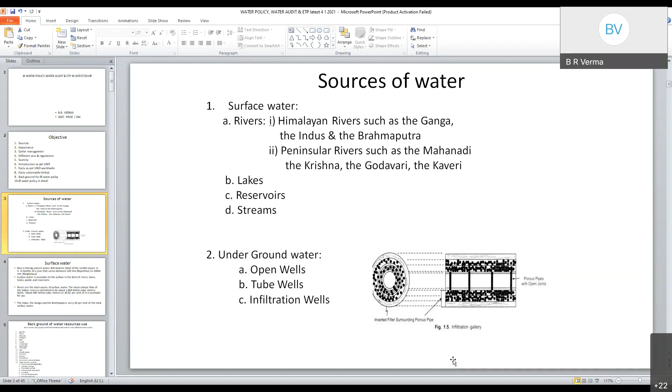Now you can see from where this surface water comes - rain is the main source of water. You can say the atmospheric cycle, which creates this rain, has uneven distribution all over the world, and also in our country.

As you know, rainfall in India is somewhere very less, as low as 100 mm, that is in Rajasthan, particularly Jaisalmer and the desert area of Rajasthan, and as much as 10,000 millimeters like in Meghalaya or some of the northeastern states.

Surface water is available on the surface in the form of ponds, reservoirs - either man-made or naturally made, tanks, and rivers, which are the main source of surface water.

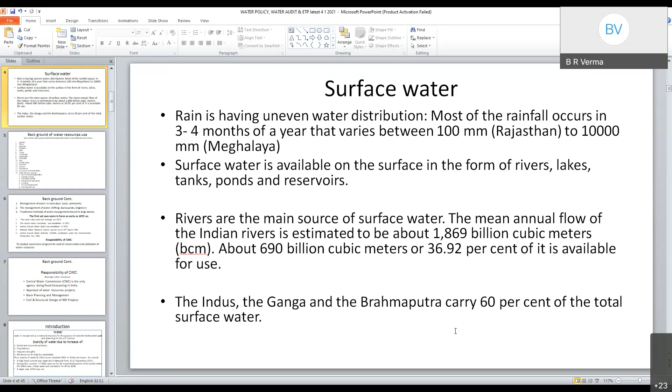The annual flow of Indian rivers is estimated to be 1869 billion cubic meters. But only 690 billion cubic meters, or we can say roughly 37%, of the river or surface water is available for our use. The Ganga, Brahmaputra and Sindhu rivers are the major rivers which generate 60% of the total surface water in the country.

Then we can go on to what was the background of water resources used in earlier days, long back, how water has been managed in society.

In the old days, people were deprived of water because of different reasons - whether gender, race, ethnicity, religion, birth, caste, language or nationality, disability, age, health status, property, prosperity, tenure, residence, economical and social status, etc.

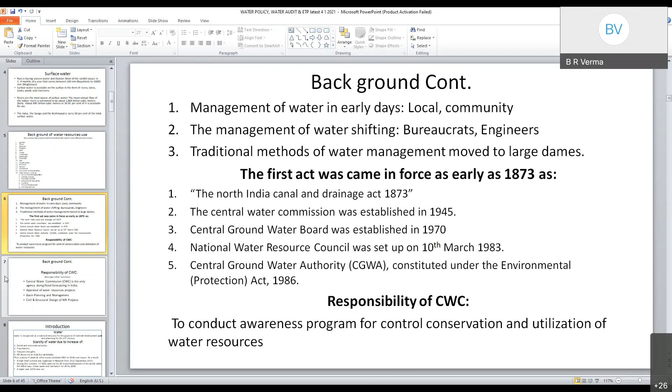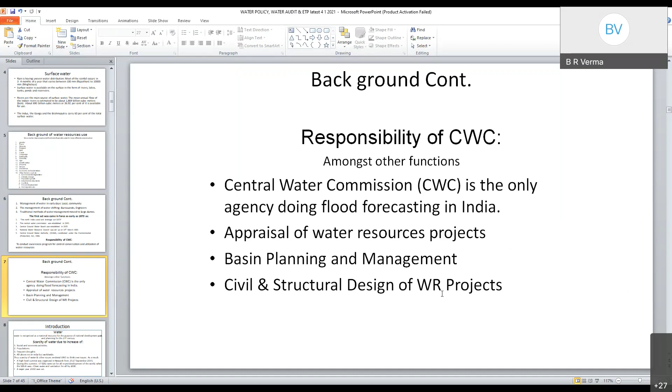The Central Water Commission, among other functions, also does flood forecasting, and the appraisal of water resource projects like big basin dams and other major civil structures, all of which come under the purview of the Central Water Commission in addition to other functions.

Water has been considered a national resource for the development of society and the country. As you know, the scarcity of water came in the way of the development of our country.

Water scarcity increased due to the increase in population and economic activities, along with frequent droughts occurring over the last several decades. These droughts, population increase, and economic activities, including industrial development, also utilize enormous amounts of water.

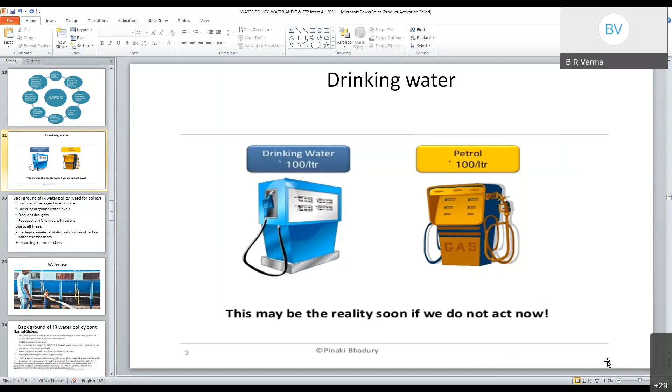So as of now, I think it was several years back, but as of now it is the real picture: the petrol and the drinking water can be bought at the same cost.

Now we come to the background of Indian Railway water policy and why it was needed. What was the need for this policy? What rendered the framing of the Indian Railway water policy?

It has been observed that Indian Railway is one of the largest users of water. Indian Railway uses the largest water in operation, in stations, for so many uses.

Then there is lowering of groundwater levels because of extensive extraction of water for agriculture as well as for drinking. As we are extracting enormous water from the ground, the groundwater level is lowering down.

Then frequent droughts also rendered this water scarcity. Also, reduced rainfalls in certain regions created scarcity of water in those areas.

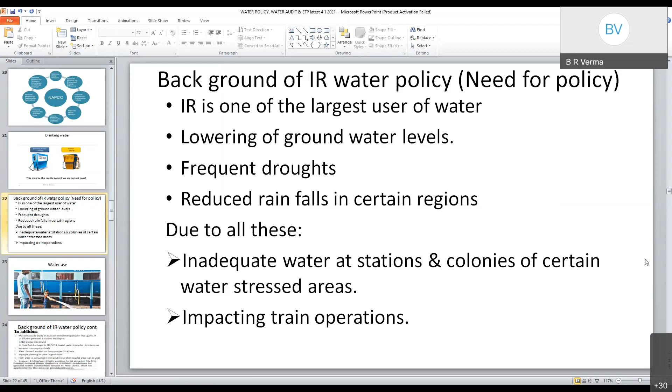The National Green Tribunal, New Delhi, issued orders in a case on environment pollution which was filed against our Indian Railway.

The effluent order was issued in the sense that the effluents generated at the stations and depots or sheds should not be allowed to seep into the ground.

First, these effluents generated at stations or colonies or hospitals, sheds, workshops, etc., should first be discharged to effluent treatment plants or STPs, and the treated water should be recycled for inferior use, so that fresh water use should be avoided or reduced.

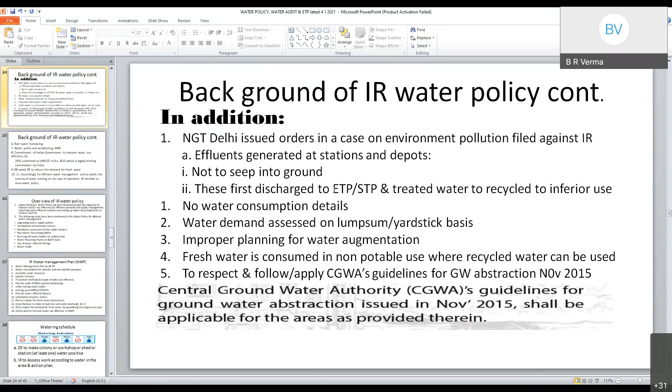Also, to respect and follow the Central Groundwater Authority's guidelines for groundwater abstraction, we are compelled to follow the instructions and guidelines set by the Central Groundwater Authority, which are in the form of a booklet published in November 2015, and that is to be followed in toto by railway. Also, rainwater harvesting was to be generated. Then water audits and establishing water recycling plants.

The Indian government made a commitment to improve water use efficiency by 20%, which was submitted to the United Nations Framework Convention on Climate Change in October 2015, and this was a legally binding commitment for India. Hence this also became one of the reasons for the Indian Railway water policy, because the Indian government committed in the United Nations Framework Convention on Climate Change that we will improve water use efficiency by 20%, and to fulfill this we have to work on this.

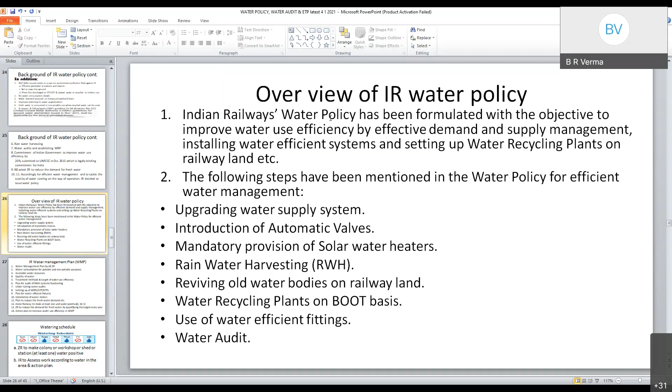Now, as per the Indian Railway water policy, a water management plan is to be framed, and it is to be developed by all the zonal railways, even the workshops and production units, at the DRM level, etc. Then water consumption for potable and non-potable purposes should also be recognized. The available water resources are to be utilized in an efficient way.

The quality of water should be ensured. The treatment methods and targets of water use efficiency should be ensured. The plan for audit of rainwater harvesting systems and their functioning is also required to be ensured. Undertaking water audits, setting up water recycling plants,

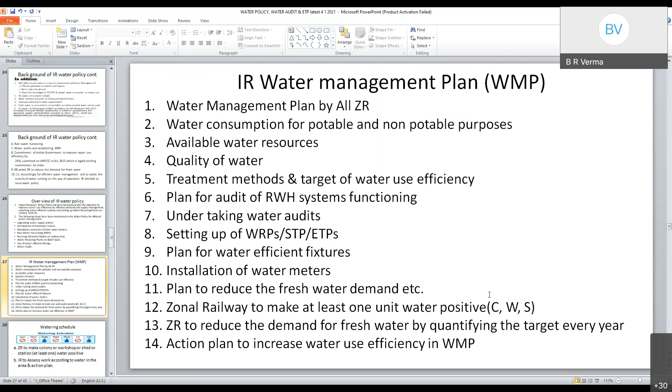Also, the watering schedule should be made and ensured, that is, which day water is to be supplied and which day not, as is available nowadays in the big cities like Delhi or Bombay or the major cities.

So zonal railways are to make colonies, workshops, sheds or stations water positive. Indian Railway is to assess work according to water in the area, and the action plan should be prepared. In that, the Central Groundwater Authority report may be consulted to assess those areas which the Central Groundwater Authority has mentioned as water stressed areas. So at least in those areas, Indian Railway is to assess the work according to water.

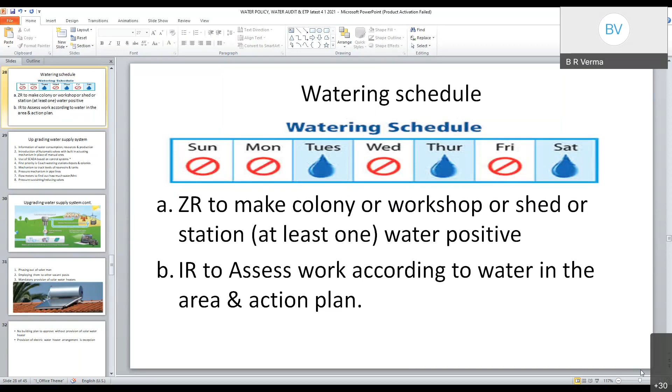Now, upgrading the water supply system: how the zonal railways and all the production units or workshops are required to upgrade the water supply system. In this, the information of water consumption, resources and production, that is, how much production, what are the resources, and how much water is being consumed in a particular zonal railway, workshop or production unit.

Then the introduction of automatic valves with built-in actuating mechanism. Prior to that, we were using manual valves, and for those valves, certain posts or a man was available to open or close them. So in place of those manual valves, automatic valves are to be introduced. This has been asked of all the zonal railways.

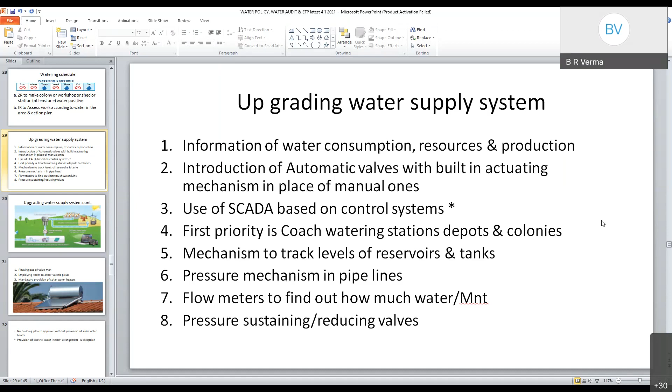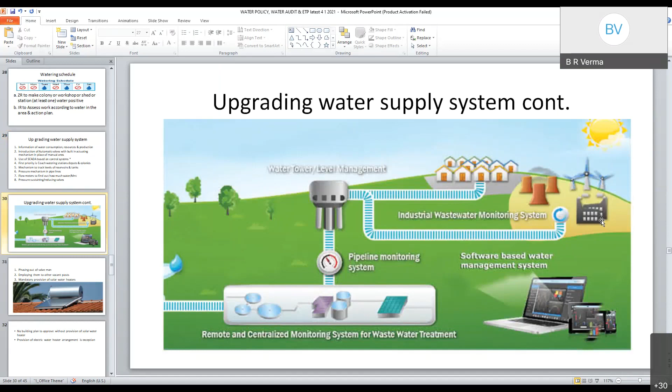Then flow meters are also asked to be developed to find out how much water per minute is being supplied. Then pressure sustaining or reducing valves. These valves automatically sustain pressure: on low pressure they increase it, and on high pressure they automatically reduce it. Such features are required to be set up so that the water supply can be upgraded. You can see, in upgrading the water supply system, this type of arrangement should be made.

Now, phasing out of valve men. A designation of a person, the valve man, was engaged in Indian Railway to open and close the valve. The work time for this man was very less; he was usually going to close or open the valve at a particular time. So railway has asked to phase out these valve men, and they are to be adjusted against the vacancies available, so that we can reduce the workforce by providing the mechanism in place of the man, employing these valve men in vacant posts.

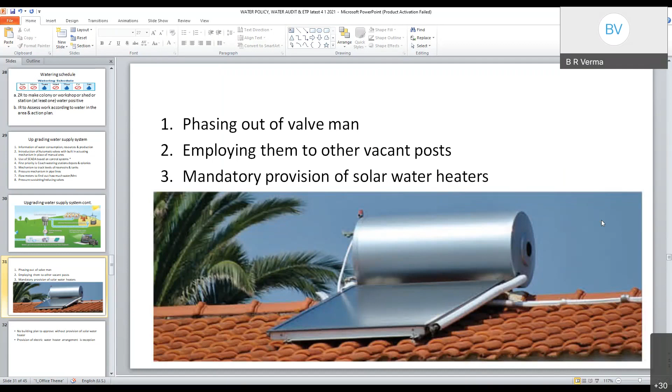Mandatory provision has also been asked of the zonal railways for solar water heaters. That is, each and every building or shed should have the provision of a solar water heater, so that we can reduce the electricity or light energy.

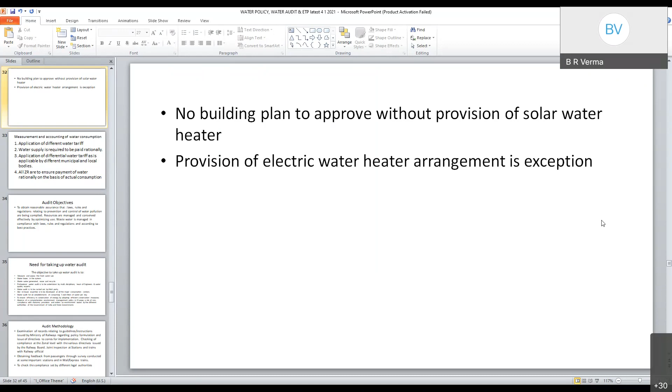Railway, the zonal railways or production units have been asked: no building plan to approve without provision of a solar water heater. Any building plan should not be approved if there is no provision of the solar water heater. In very exceptional cases, the provision of electric water heater arrangements may be made only on an exception basis. Wherever solar water heaters are not applicable, in those areas, in exception cases, the provision of an electric water heater can also be arranged.

Then the measurement and accounting of water consumption, how much water is consumed, so that water consumption measurement is to be ensured. The application of different water tariffs, for example, for the commercial use of water, for our colonies or the staff use, or the house application. The water supply is required to be paid rationally.

The application of differential water tariff is to be taken from different municipal or local body tariffs. So the municipal or local body tariffs should be taken, and it should be applicable to our railway water supply wherever it is required, and the water supply is to be paid rationally.

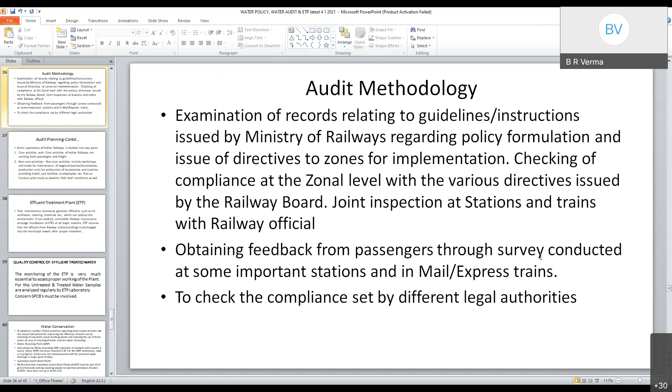And to check the compliance set by the different legal authorities. Okay, so whether the guidelines or the requirements set in the manuals or different specifications are complied with or not. So that is also required to be checked.

So the entire operations of Indian Railway, as far as the audit is concerned, we can divide into two parts. What are the core activities? Indian Railway carrying passengers and freight, that is the coaches and wagons which carry the load and the passengers. So that is the core activity.

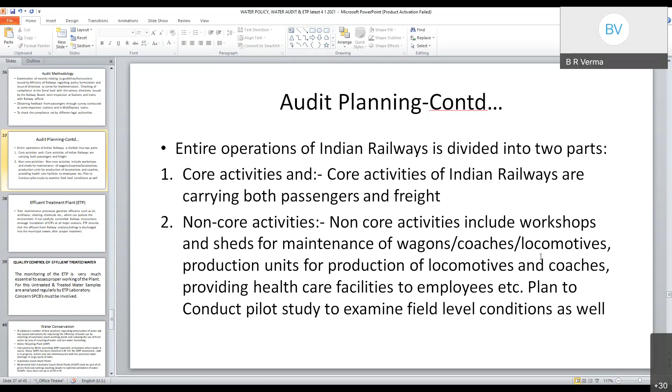And the non-core activities are nothing but the workshops, the sheds where we maintain the wagons, coaches, locomotives and their parts, the production units where we produce coaches, locos and wagons, the healthcare facilities to employees, etc. And plan to conduct a pilot study to examine field level conditions as well in the audit planning.

Now we have come to the effluent treatment plant. The effluent treatment plant is where we treat the used water from the different assets. As you know, the train maintenance process generates different types of effluents: oil, antifreeze, cleaning chemicals, etc. These can pollute the environment if they are not carefully controlled or treated.

So railway instructions have been given for the installation of effluent treatment plants at all the major stations. These ETPs should ensure the effluent from the railway station or siding is discharged into the municipal sewers only after proper treatment. That is, the effluent treatment plant must ensure that the used water is treated properly, and only after treatment is this treated water discharged into the municipal sewers.

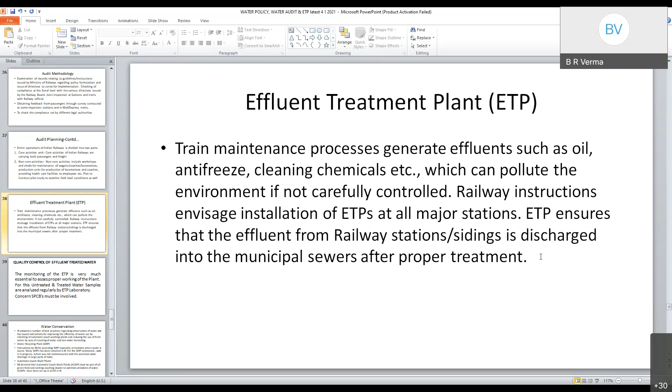Then the quality control of effluent treatment plant water: monitoring of the ETP is essential to assess proper working of the plant. It is mandatory to monitor all these ETPs regularly. We take untreated and treated water samples, and these are analyzed regularly by the ETP laboratories.

Everywhere we have laboratories, whether it is a production unit or the workshop, and in these laboratories we regularly analyze treated and untreated water. Now, as far as the SPCB or CPCB, that is the State Pollution Control Board or the Central Pollution Control Board, their representatives must be involved during the certification and renewal.

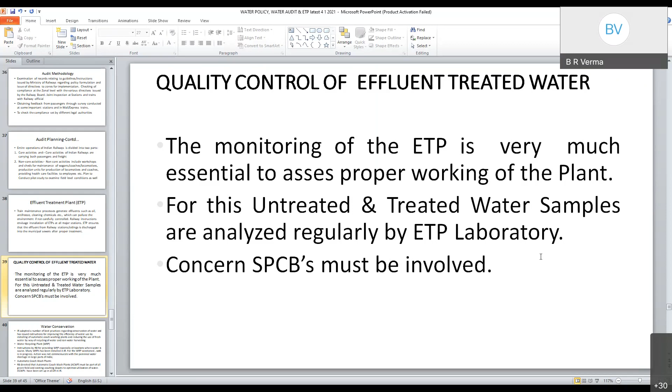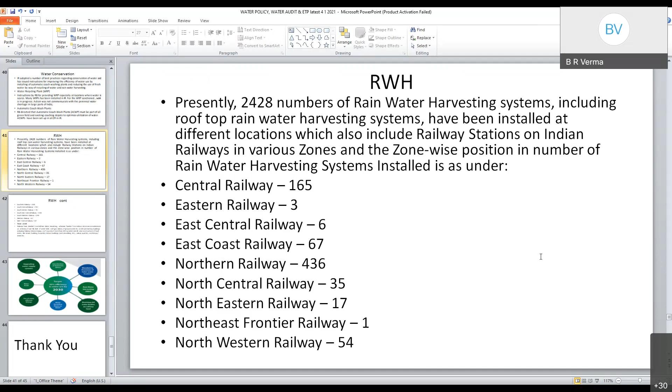Now we can see so many of the rainwater harvesting... everywhere rainwater harvesting is mandatory. Even the new buildings to be constructed having a rooftop, rainwater harvesting is mandatory. And rainwater harvesting has been made mandatory to install at different locations, which also include the railway stations, the various zones, and zone wise you can see. Now it has changed. I think more and more rainwater harvesting has already been installed, but still it is in progress. So Central Railway, then Eastern Railway, East Central Railway, East Coast Railway, Northern Railway, etc. are having so many rainwater harvesting plants.

Now railways have decided to install rainwater harvesting wherever feasible from techno-economic considerations, and intensity of rainfall, level of water table, soil type, salinity of groundwater, etc., on all such existing buildings, including railway stations, having rooftop area of more than 200 square meters. They have also made it mandatory that buildings to be constructed having rooftop area more than 200 square meters are only to be approved if rainwater harvesting is adopted. Okay, so rainwater harvesting is mandatory for those buildings.

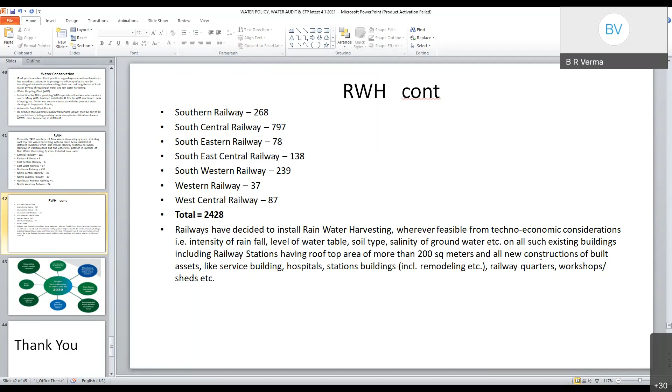And in a nutshell, overall, we have to improve the water use efficiency by 20% before 2030. That is our aim, and you can see the overall target for the water use efficiency. So this is all about the Indian Railway water policy.

Am I audible? Yes, yes, sir. Yes, sir. So yes.